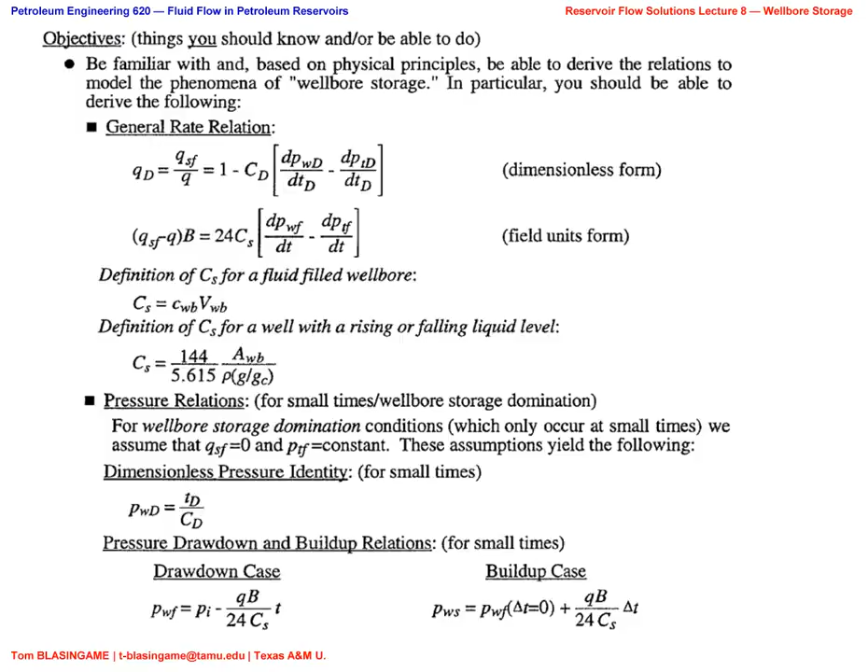So we have two possible conditions. We have a fluid-filled wellbore. Could be gas, could be liquid. It's under compression, just like I said. We open the valve at the top.

You like this artist drawing? The artist is me, of course, so say yes.

We open the valve at the top. What happens at the bottom? Nothing. But in time, eventually, flow begins at the bottom. Okay? Now, in this case, it's a pumping well. So there is a liquid level here. And so when we pump the well, the liquid level drops. When we stop pumping, the liquid level rises.

How many of you know about our well out here by the other building? You've seen it over by geology. This is exactly the configuration of that well. Exactly. Only that well is a water well, okay? It goes down to about 400 feet. If you want to see some data from it, I can show you. It's in my P620 324 lectures.

We used to run pressure transient tests on it all the time. And you would chase this water level with a resistivity device and follow it down. And then when you shut the well in, you'd follow it back up. This is your wellbore storage feature. Now, what we're going to have to do is define a mass balance on the wellbore. So m dot in minus m dot out is the differential, the accumulation term.

So we set all this up, and I apologize for all the American units, but this is America. So then we do that, and we end up with an expression that's defined something similar to this. And so this says that the rate difference multiplied by the formation volume factor, because we have to work in reservoir barrels, is equal to 24. Why? Because we work in hours. And then we have what? The volume of the wellbore change over time. And we'll have to come up with whatever we think that is.

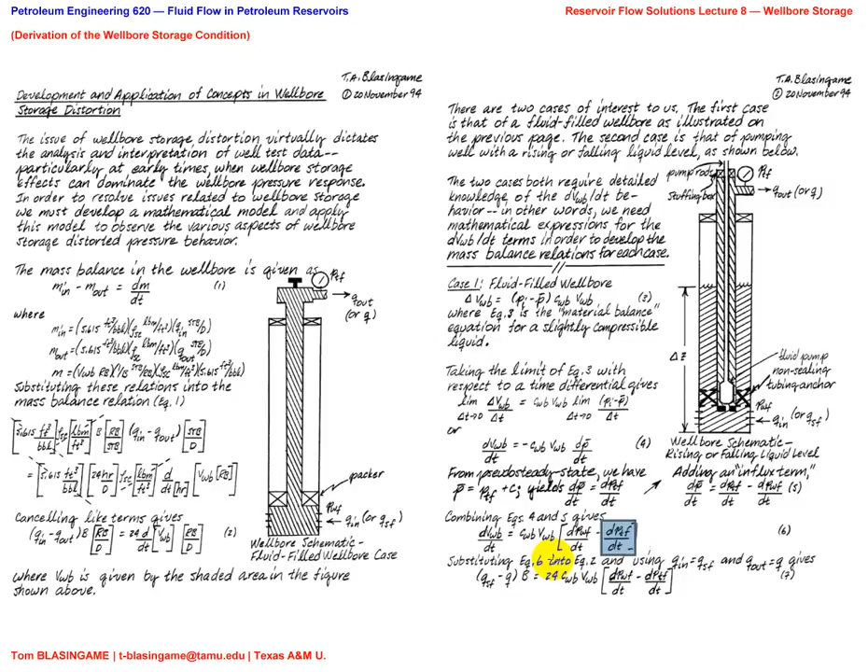Okay, so we had to have an influx term, which is this pressure at the bottom of the well. And what do you think we're going to do to make this easier? Well, we'll talk about that in a minute. So then we go on ahead and define our rates, because the change in volume is actually rate. And then when we're finally done, we go ahead and define our constant. Our wellbore storage constant is called C sub S, and it's just the wellbore volume multiplied by the compressibility of the fluid, my apologies.

So we have the sand face rate, which is at the bottom of the well. We have the surface rate, which is Q. We have formation volume factor, 24, which is number of hours in a day. This thing, which is reservoir barrels per PSI. And then we have PSI per time, PSI per time. And this is the bottom hole pressure. This is the surface pressure. We'll talk about this more in a minute.

Now, I will say that if you're staring at this, you're going, that is a really complicated equation. It's not, actually. It's a very simple material balance. And it tells you that the sand face rate, when you first start producing, is actually 0. The surface rate can be whatever it is. Now we're going to look at a rising or falling liquid level case. So the change in the wellbore volume, we have to, again, use the barrels conversion.

Again, use the area in feet squared. But now we're looking at the delta, the change in height, which is here. So we have to know that. And when we do that, we set this up. We take it again as a limit: the change in volume with respect to time. Delta T goes to 0, so that becomes a derivative.

And that tells us the change in height with respect to the change in time; take the limit of that. We end up with the change in wellbore volume is equal to this conversion factor multiplied by the wellbore area multiplied by the change in Z with respect to time. And that, of course, makes perfect sense.

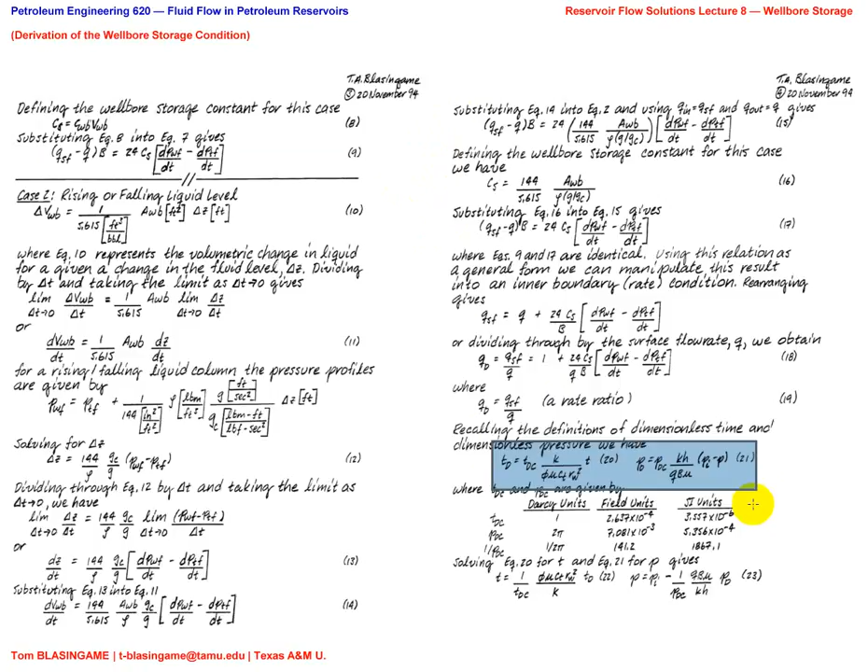Okay? So now we want to define this as a dimensionless rate, QD. So it's a sand face rate divided by the surface rate. And then we apply the definition of dimensionless variables. You'll understand this in a second. Once we've applied the definition of dimensionless variables, we have the definition of the dimensionless wellbore storage coefficient, and we have the definition of dimensionless rate.

So the dimensionless rate that the reservoir is seeing is 1 minus some dimensionless wellbore storage coefficient times the derivative of the dimensionless wellbore pressure as a function of time, minus the derivative of the surface pressure in dimensionless form as a function of time. What is this rate at time equals 0? At the bottom of the well, what is this rate? 0. Okay.

I also mentioned some other things about how Fair looked at this and how other people did things. If you integrate the previous version of this equation, which is given by QD is equal to 1 plus this stuff, you get this final form.

Now, why did I do this? Why did I eliminate the tubing pressure term? Why did I do that? I did this because we don't know what it is. The truth is, we want to simplify this expression. And this is a weak link. If you want to study more about where this is not equal to 0, then you have to go to the phase redistribution paper. Okay.

Now, people knew what phase redistribution was before they knew how to model it. Equation 26 is fine. That is the correct equation to use. But we're going to assume what? That the surface pressure is constant. What's the derivative of a constant? 0. Is the surface pressure constant? No. But it will significantly reduce the complexity of this problem if we assume it is. Okay.

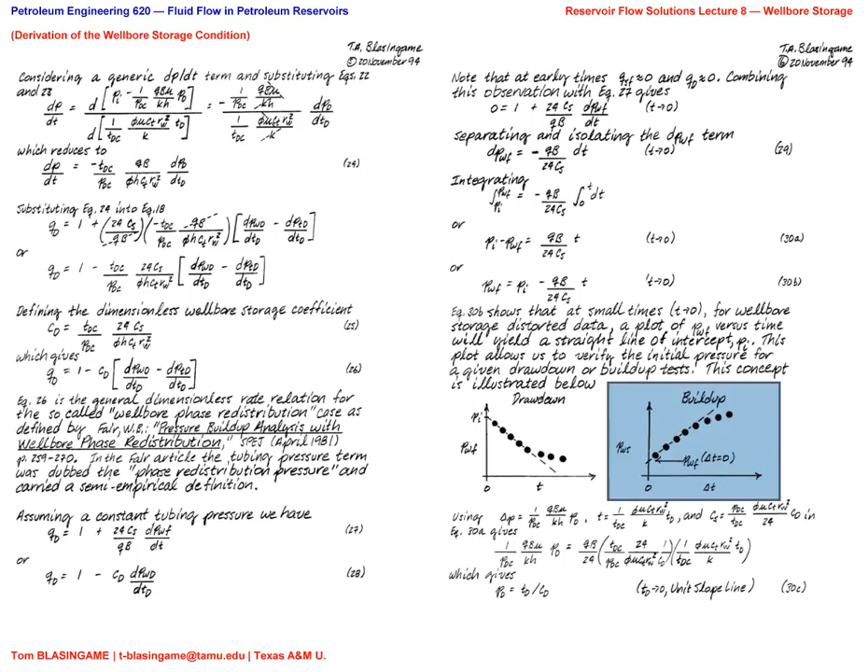So the degradation of that, or whatever you want to call it, the buildup signal is going to reflect the wellbore. Okay? So we continue to make this non-dimensional, and finally we end up with all these nice equations describing wellbore storage. Now, how do we solve, or how do we construct the wellbore storage solution? We already derived the expression for convolution. Okay? We need an expression for dimensionless rate. So what we're going to do is we're going to take the Laplace transform of the convolution form, and that'll give us this, no problem.

Okay? This is actually the deconvolution expression, because this is what we want to solve for. But of course, the reciprocal of the inverse Laplace transform is not the same as the Laplace transform of the reciprocal function. So this isn't going to work out very well, but that's okay. So we move this over and we solve for this expression. Now, how do you invert this, class? How can you invert that expression?

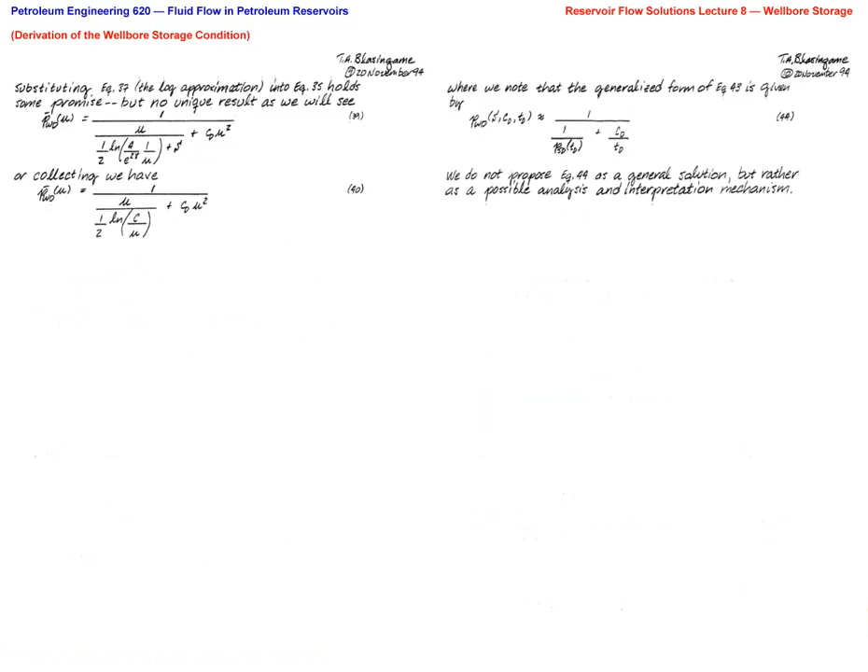So let's try the case we know, which is the infinite acting line source solution, which is this. And when we substitute that in, we have this. Can that be inverted? Yes, it can. This is actually from Van Everdingen and Hurst, but Agarwal, Al-Hussainy, and Ramey show how to do this. But this is not fun. Anybody else got any ideas on how to invert it? Is there anything else? We could try to use the log approximation, but we just end up with something still pretty ugly. We can cheat and use a sampling function known as the Schapery approach, but that isn't going to do us very much good.

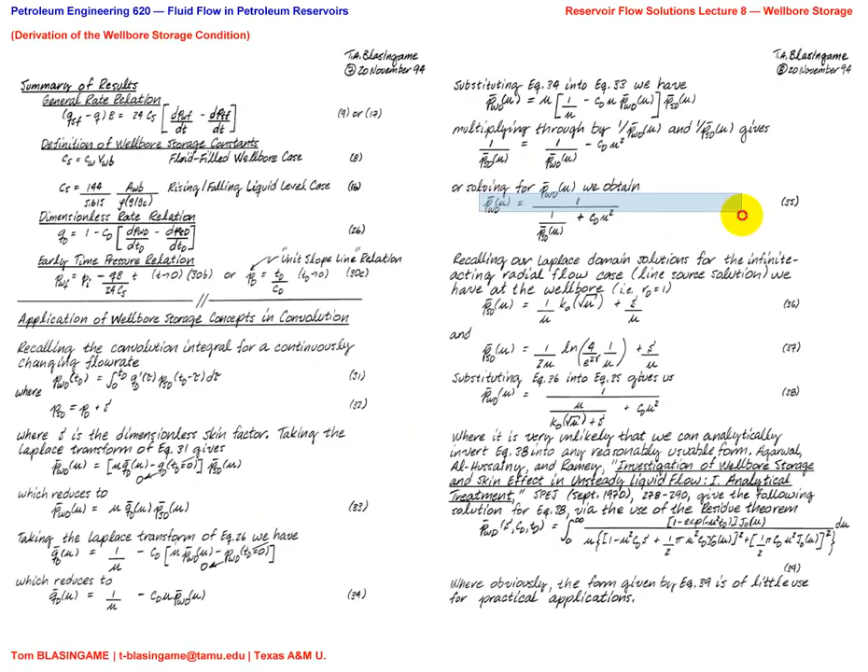So again, very simple form of an equation right here. In the Laplace domain, this is a very simple relationship. All we have to do for any case where we want to know wellbore storage is substitute our solution into that PSD term. But we cannot solve it explicitly. So what do? Alex? It's 9 o'clock. We stop class. We say, we'll just have to invert this numerically and walk away. PanSystem, Kappa, Fekete, Pi, Joe Schmo from Kokomo, my Piranha program, every one of them does this. Every one of them. You have to use numerical inversion to solve equation 35. Every one of them.

You want to derive a solution to something, you want to create an addition to the petroleum literature that really changes something, figure out how to solve that equation. But remember what I just told you. The form is all wrong. Now, math ladies, this is where engineering gets a little weird. How would you solve it? Okay. Next guess. How could you solve it approximately? What if we came up with an expansion? Sorry? Say it again.

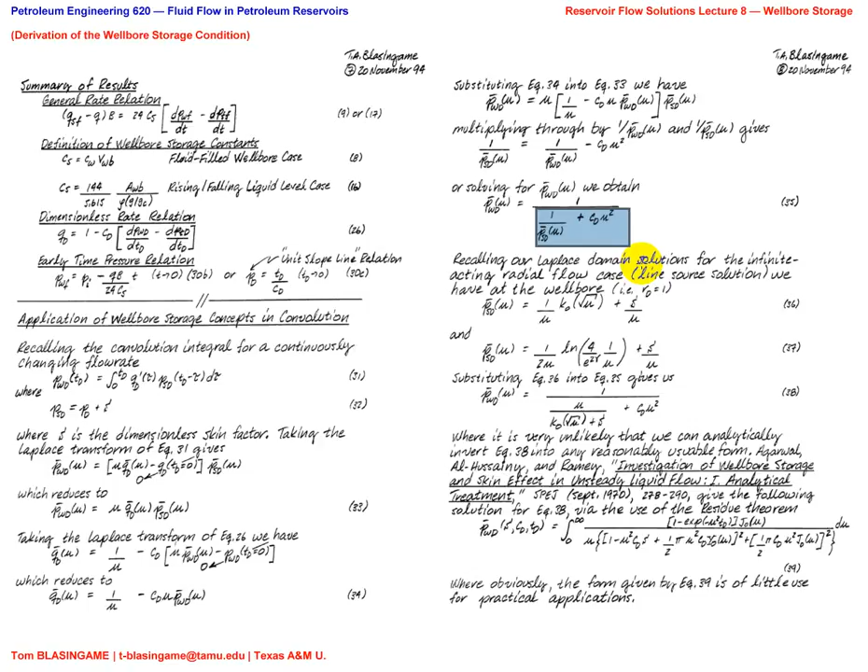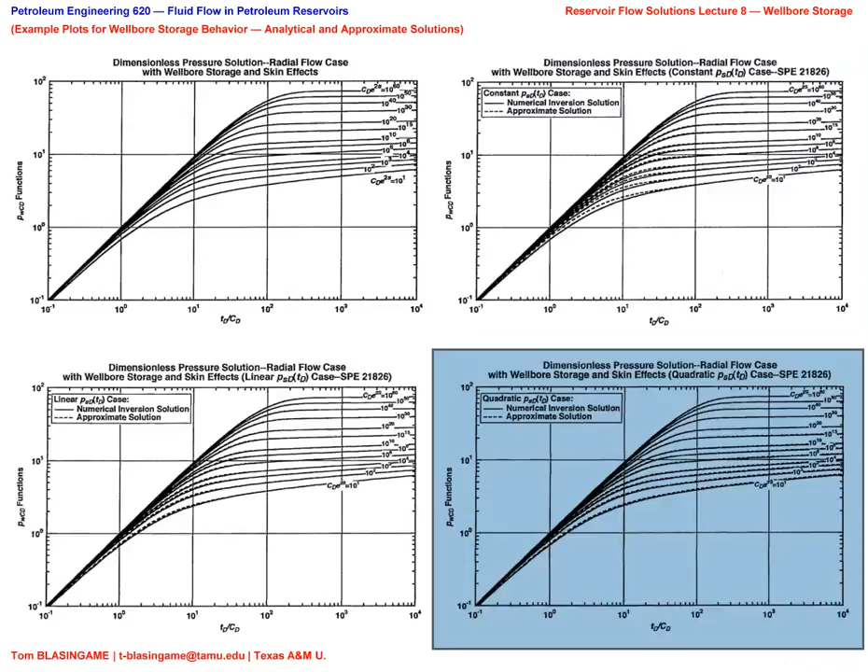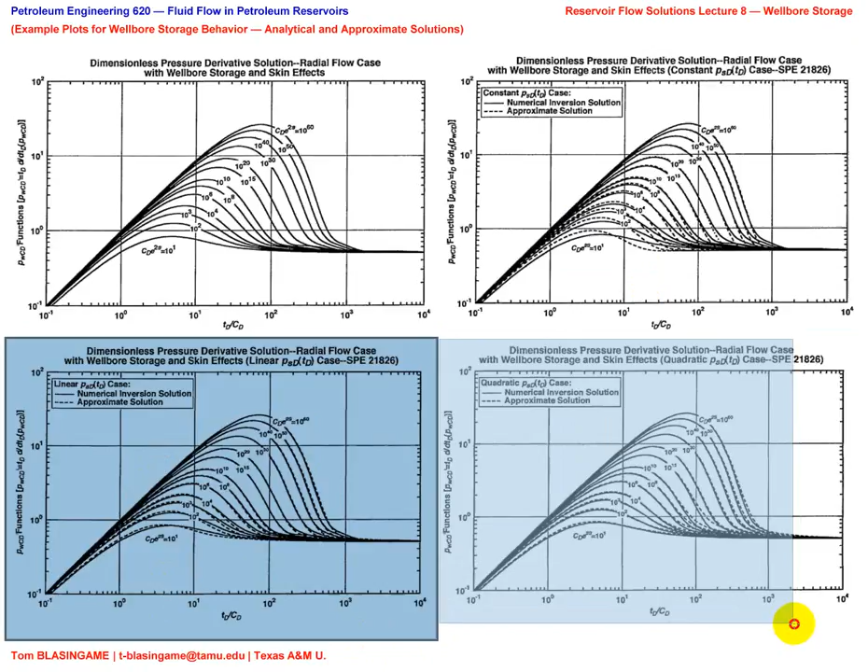But math ladies, let me ask you a question. I cheated to do this. I cheated. The math gods do not forgive cheating, right? It turns out that we actually have a nice closed form for only one piece, which is the constant case. The linear case is a lot of algebra, and the quadratic case is a lot of algebra times a non-trivial integral. Okay, it's not really that bad, but you could solve this problem directly.

What's the most important two-word question in the English language? What is it? So what? How does this help us? No habla? If we can solve this completely and explicitly, then we have promise of being able to use this as an analysis tool. But it's not good enough. Even though it looks good enough, it's not good enough. What does that mean? It means it might work, but in the sections where the derivative doesn't agree, it's not going to be good enough. And therefore, what's going to happen? We're going to get the wrong shape, the wrong interpretation, the wrong kind of behavior. What's the only thing that will work?